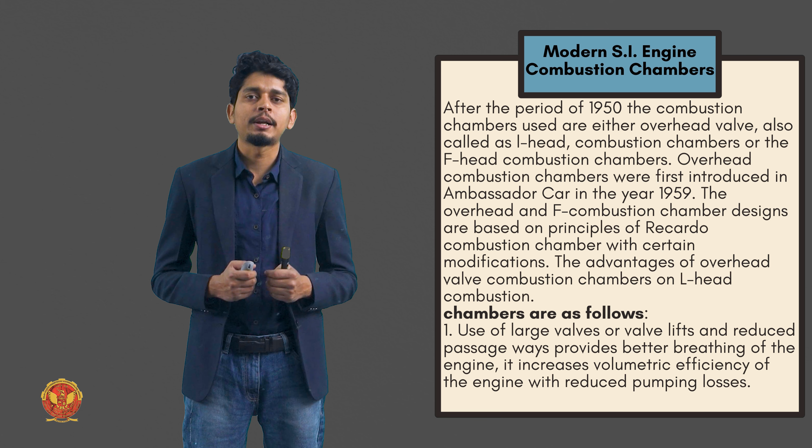There are certain advantages of overhead valve combustion chamber design over L-head type combustion chamber design. Use of large valve or valve lift and reduced passageways provide better breathing of the engine. It increases the volumetric efficiency of the engine and reduces the pumping losses.

The second advantage of these types of combustion chamber is it gives less tendency to detonate due to reduced flame travel distance, less force on the head bolt, and reduced possibility of leakage.

The next advantage of these types of combustion chamber is the exhaust valve is incorporated in the combustion chamber head instead of the cylinder block. Therefore, heat failure is limited to the head only, that's why we can easily replace the head if any incident occurs.

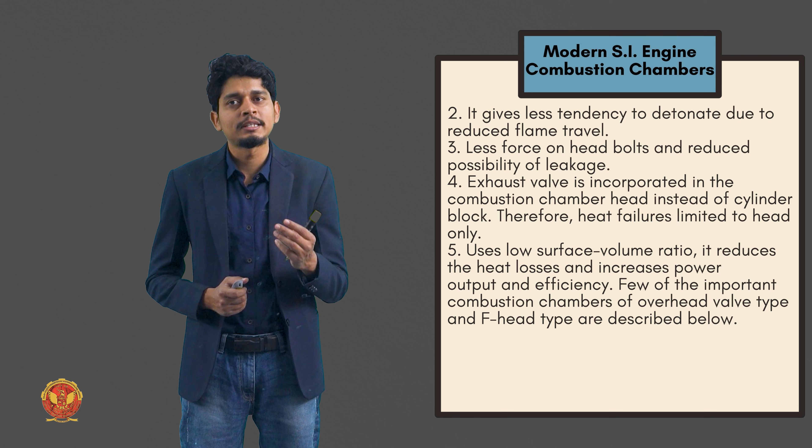Use of low surface to volume ratio reduces the heat loss and increases the power output and efficiency. There are some types of modern combustion chambers.

The first one is the bathtub combustion chamber. These types of combustion chamber are simple and easy to cast. Both valves are mounted on the head along with the spark plug - means all three are mounted on the head of the combustion chamber.

There is a clearance or gap or space between the head and the top surface of the piston when the piston is at TDC, the top dead center. The valves are provided in a single row in the head, which reduces the size of the valve. Because of this disadvantage in the design, it reduces the breathing capacity of the engine and increases the pumping losses.

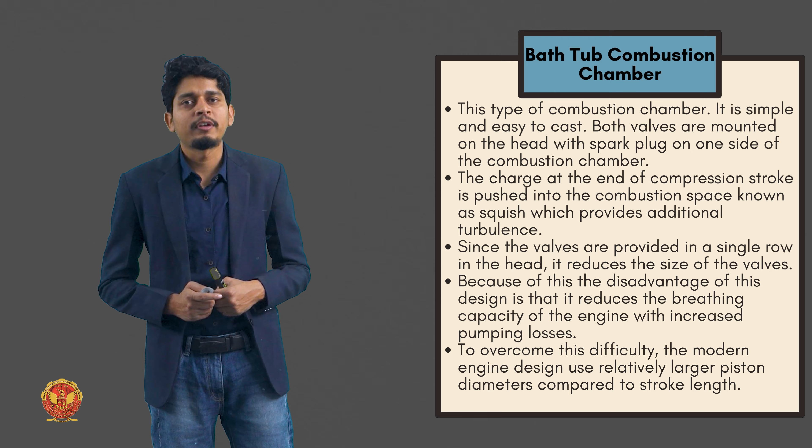The next one is the wedge head combustion chamber, another modern combustion chamber design. The valves in this type are placed in an inclined position, with a unique inclined valve seat arrangement.

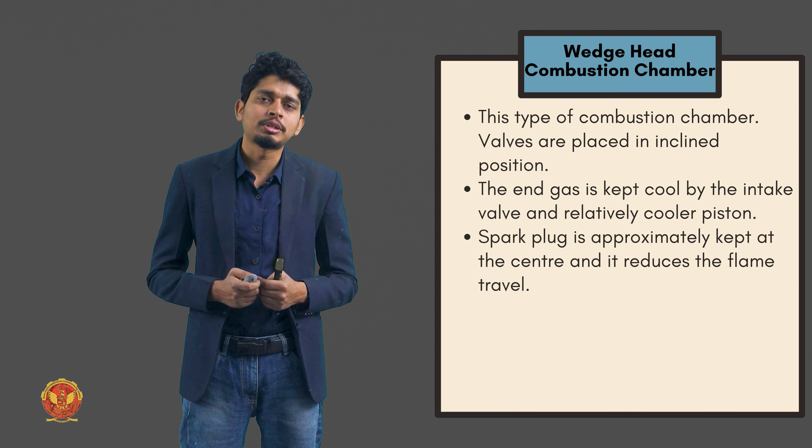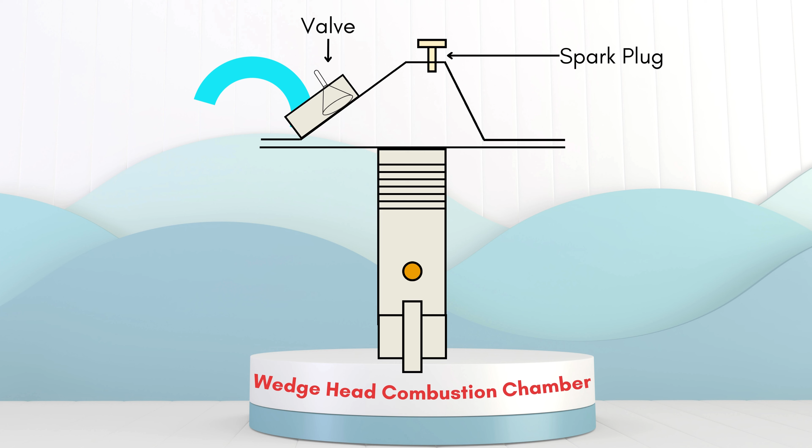The end gas is kept cooled by the intake valve and relatively cooler piston. The spark plug is kept approximately at the center, which reduces the flame travel distance. In any type of combustion chamber, if you put the spark plug at the center of the head, the flame travel distance will definitely get reduced.

The next modern combustion chamber is the F head type. It was first introduced by Willys Jeep in India. This combustion chamber is also wedge shaped, similar in design to the Rover head type, and has all the advantages of the modern combustion chambers discussed earlier.

The inlet valve is kept in a vertical position with a large intake area to increase the breathing of air and reduce pumping losses. During the compression stroke, air creates turbulence due to backflow into the combustion chamber. Additionally, turbulence is created by the left hand portion of the piston head at TDC through the squish action.

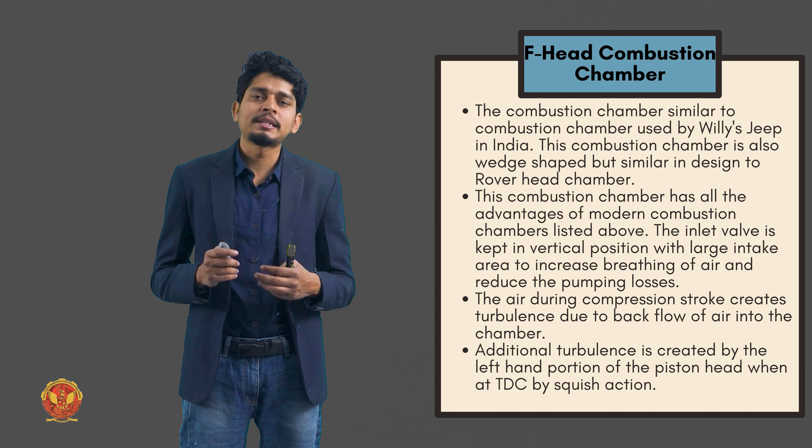I have already told you the meaning of squish - it is the space between the piston top surface and the cylinder head. This squish action somehow helps to increase the turbulence.

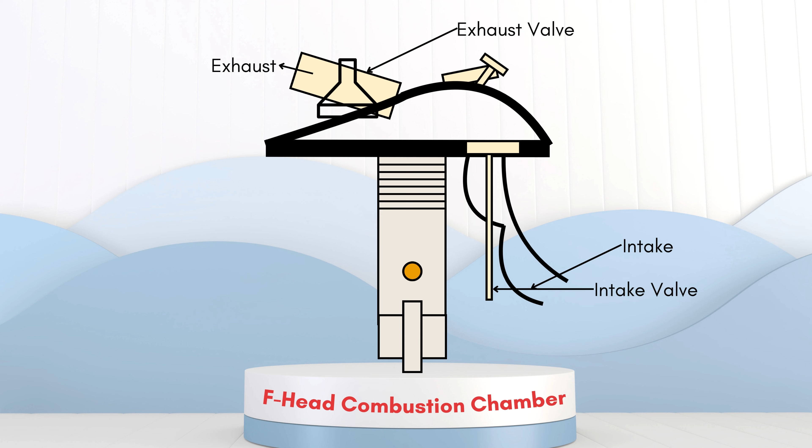You can see the F head type combustion chamber design on the screen. You can easily understand the advantages of using this design - it provides turbulence to the mixture, and since the spark plug reduces the flame travel distance, this is beneficial in this type of combustion chamber design.

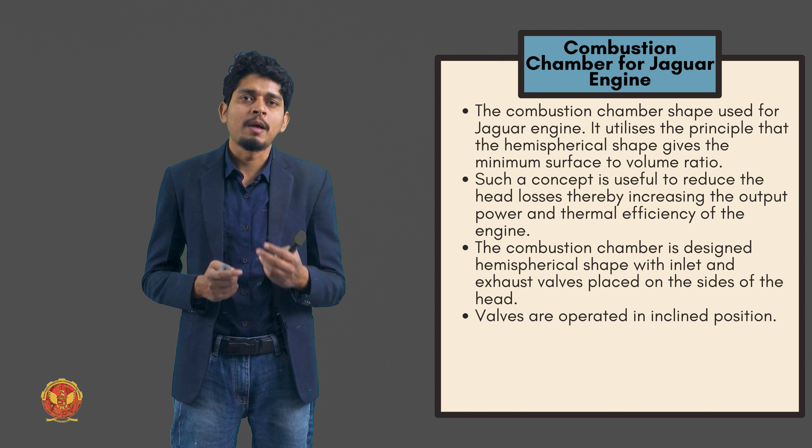The last one is the combustion chamber for the Jaguar engine. What is its importance? It utilizes the principle that the hemispherical shape gives the minimum surface area. We already talked about surface area to volume ratio - surface area should be minimum to avoid heat losses. This concept is useful to reduce heat loss, thereby increasing output power and thermal efficiency of the engine.

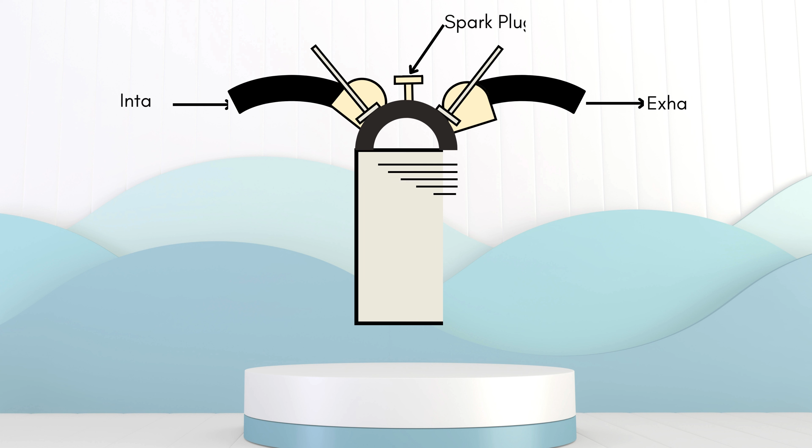The combustion chamber is designed in a hemispherical shape with inlet and exhaust valves placed on the side of the head, operated in an inclined position. You can see on the screen the Jaguar engine combustion chamber design.

You can see the inlet and outlet valves located on either end of the combustion chamber - inlet valve at one end, outlet valve at the other end, and a spark plug located at the center of the combustion chamber.

The hemispherical shape is used not only to reduce heat transfer losses by virtue of low surface to volume ratio, but also permits the use of large diameter valves, therefore high volumetric efficiency can be obtained. The crown of the piston is shaped to produce required turbulence, increasing flame speed and reducing the tendency to detonate.

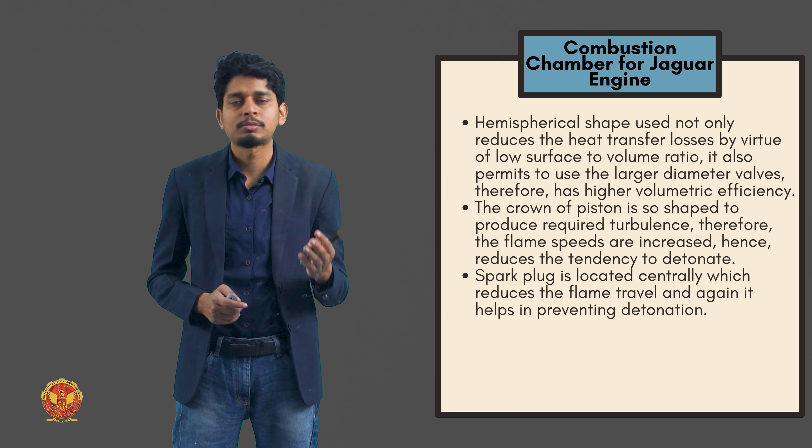The spark plug is located centrally, which reduces the flame travel distance. This helps reduce detonation and knocking, because when we reduce the flame travel distance, it reduces the chance of pre-ignition. When the chance of pre-ignition reduces, it will affect the tendency to detonate and reduce the tendency to knock.

These are the modern types of combustion chambers that we are using today in different types of vehicles. All of them have certain advantages and certain disadvantages.